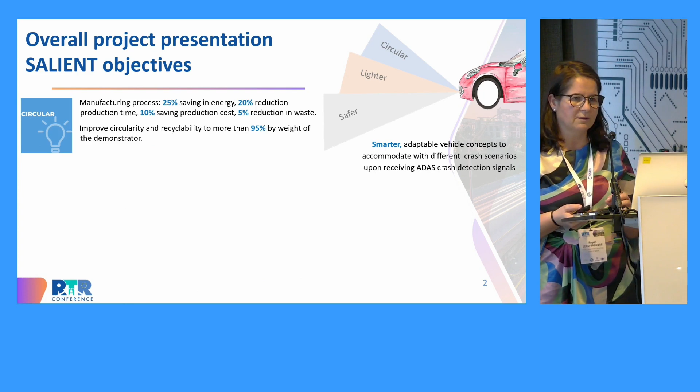Well, the big objective I mentioned before is to improve the safety of the occupants when a crash occurs. It's not possible to avoid all crashes, so we have to be prepared for when a crash happens. This is the big goal, but we have 3 other points that we think are also important. Safety has a cost in terms of materials, in terms of money, in terms of the different materials and processes we need. But we can't forget that the automotive sector is very sensitive to cost, so we have to keep that in mind.

We should be sure that circularity is assured in terms of energy consumption, material consumption, and waste reduction. We have to think about all these points. Here we have some numbers that are the technical objectives, the quantitative objectives we have in this project.

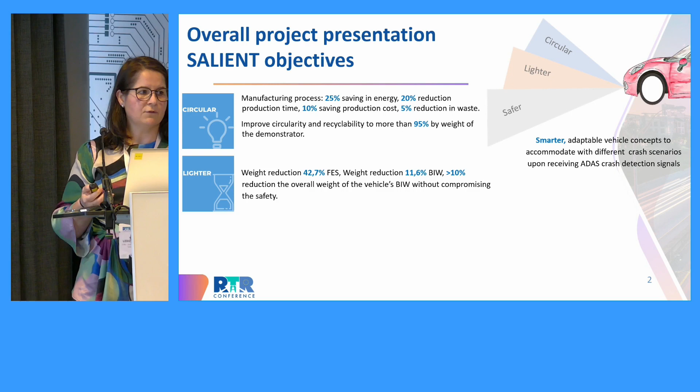We think we also have to consider weight reduction. The safety of passengers should be better, but we have to reduce the weight of the car. So we are working on a reduction of around 42% in the front-end structure. I'll explain later, but the focus, the scope of this project, is the front end of the vehicle.

And I talk about safety. Safety is the big question, the big goal in this project. So when we talk about safety, we have to improve the correlation between the simulation and the real physical test. If we are able to improve this point, the final results in real cars, in the cars on our streets, will be better.

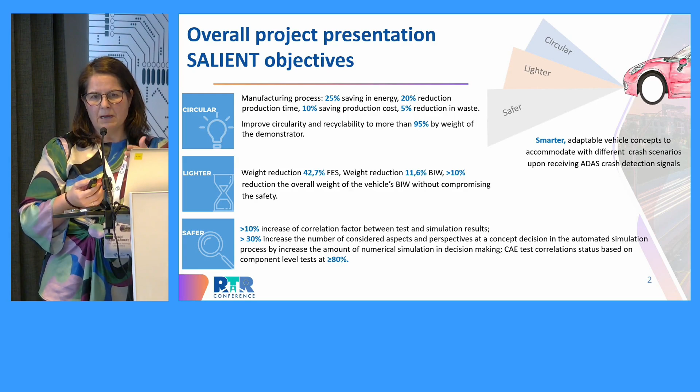Another important point is that currently the standards, the Euro NCAP and other homologation standards, cover a number of different scenarios or crashes, but these scenarios are changing. So we have to be prepared for this.

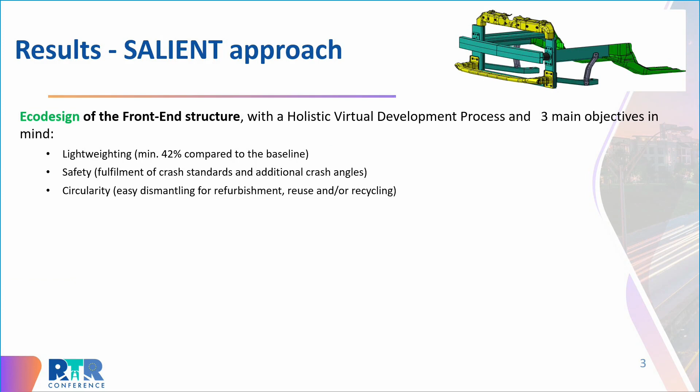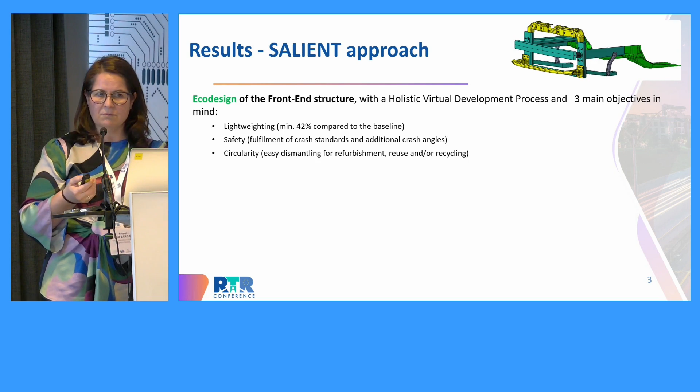So as I mentioned, the goal and scope of this project is the front end of a car. We have chosen the front end because it's the most important subsystem in the car when talking about frontal crashes, and these frontal crashes are the worst in terms of injuries and fatalities. And we have to keep in mind lightweighting, safety, and circularity.

This is, very briefly, the approach we are tackling in Salient. We are dealing with new materials, or rather including some innovations. Then we have to talk about manufacturing processes. All these parts, materials, material behavior, processes, and so on, we need to simulate. We have to be sure they are working at a virtual level.

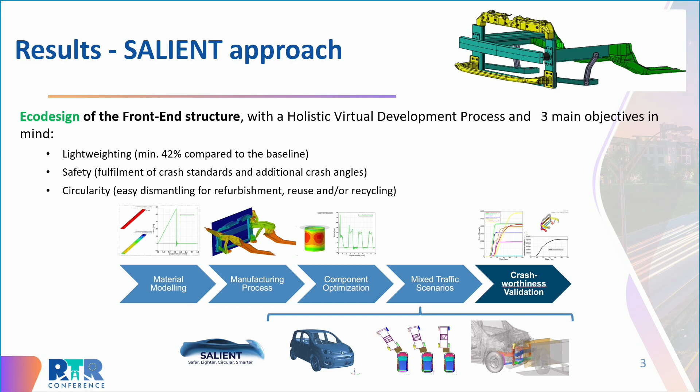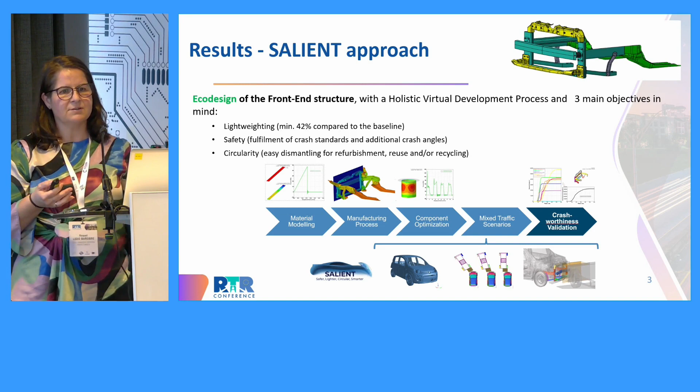Then I talked before about different scenarios. Some years ago, the differences between cars in terms of size and weight were not as high as now. Today, with the electric vehicle and so on, the differences in weight, size, and height in cars are really high. And obviously, when a crash occurs, the impact is really different from a small car of 1,000 kilos than from an electric SUV of 2,000 kilos.

So we have to think about these different scenarios, and also about the different angles of these crashes, because as you all know, the behavior of the car is really good when the crash is at 90 degrees and right in the middle of the car. But if it goes to the sides, or at different angles that aren't 90 degrees, the behavior is really different, so the impact on the occupants is really different. We have to keep all these points in mind to work on them.

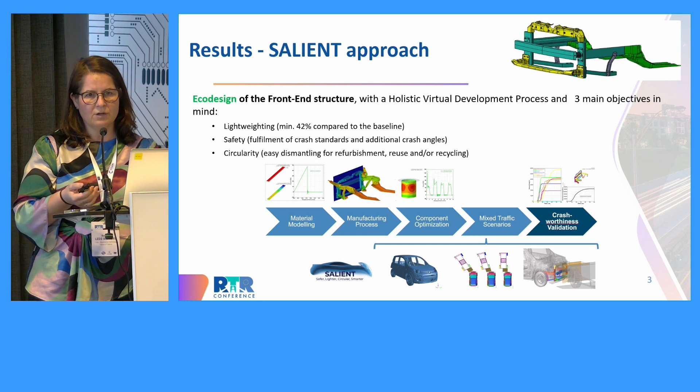And obviously, at the end, we have to be sure that our new subsystem, our new front end, is meeting all the requirements in terms of crashworthiness.

So, materials. What are we doing in Salient with materials? I think most of you would agree that the best solutions at this moment are multi-material solutions. There isn't one magical material. Well, maybe if we talk about graphene or something like that, but we are in the automotive sector, so cost is important. Cost effectiveness is a key factor, so multi-material is the good solution for us.

In this case, we have chosen two materials. One is aluminum, because if we talk about weight reduction and cost effectiveness, we think aluminum is the best option, or at least one of the best options.

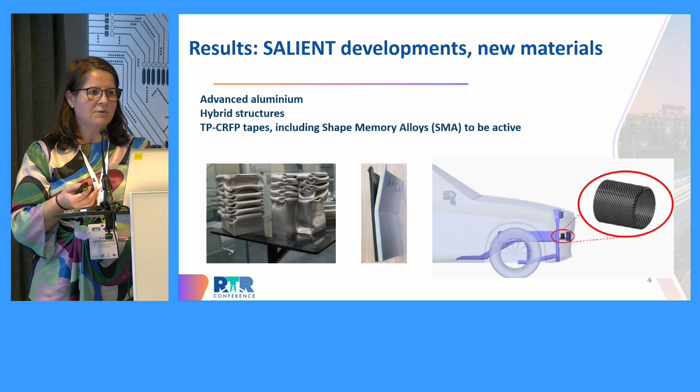And then we are also going to work with thermoplastics reinforced with carbon fiber. You could say we're always talking about money, and carbon fiber isn't cheap, that's true. But we are talking about tapes, meaning we only use these thermoplastic tapes with carbon fiber reinforcement in some places to reinforce the structure. So in the end, the quantity of carbon fiber is not so high, which makes it a good option.

This was in terms of materials. If we talk about what is the approach we are using, we are proposing an eco-design strategy. What I mean when I talk about eco-design strategy...

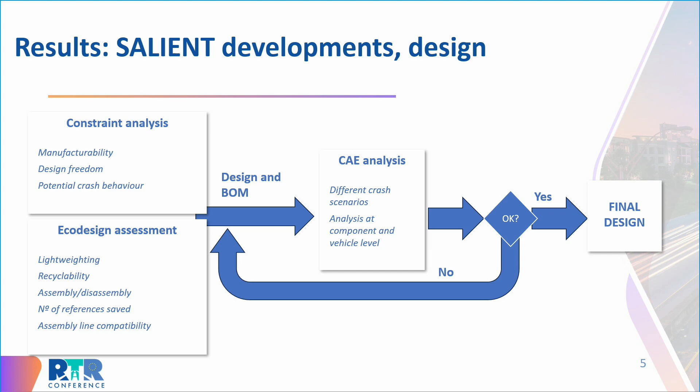First of all, we have to keep in mind the constraints we have in all development, in all projects. We have to be sure that the designs we are proposing will be manufacturable, able to go to the production line. And obviously, if we have to improve the safety of the passengers, we have to meet the crashworthiness requirements. This is mandatory, we can say.

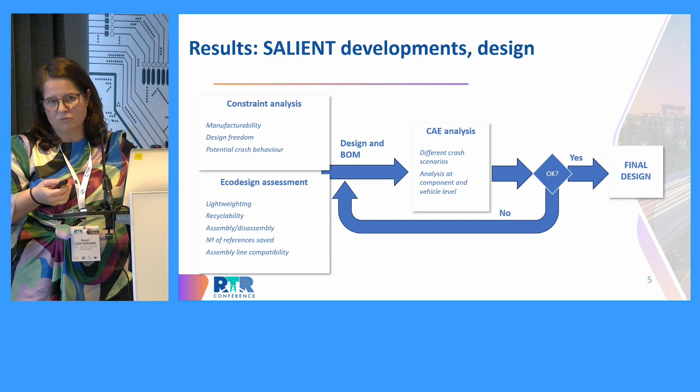When we talk about eco-design, we mean that when we are designing a new part, a new component, we are not thinking only in the behavior of this component. We have to think also about the environmental impact of this part, the environmental impact of the process we are using, and how is the solution for the end of life of the vehicle when we need to recover some part. Is it possible to reuse it, recycle it or not.

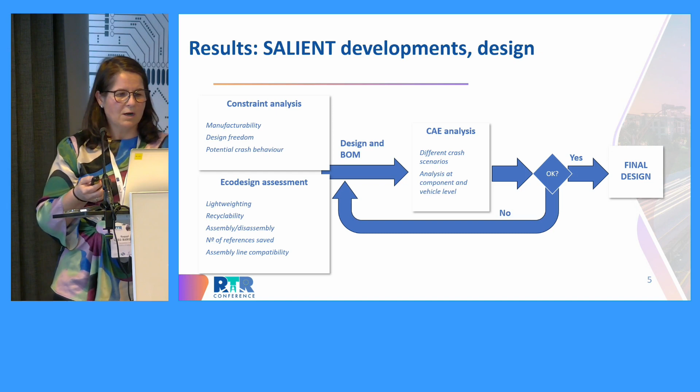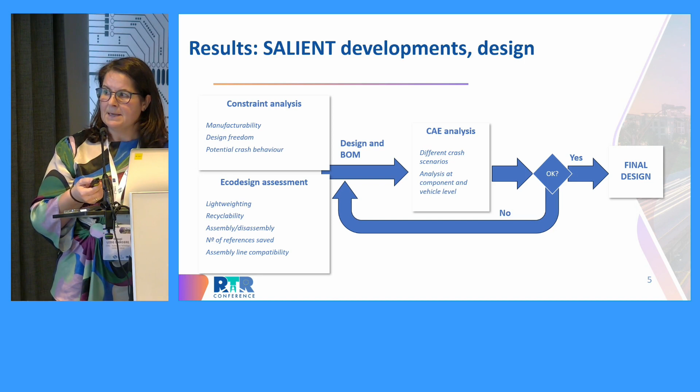So we have defined 5 points: recyclability, the capacity of assembly and disassembly, the integration we can achieve - that is, if we can go from 4 or 5 different parts to only one part - and the compatibility with the assembly line. And obviously lightweight, because it's one of my objectives.

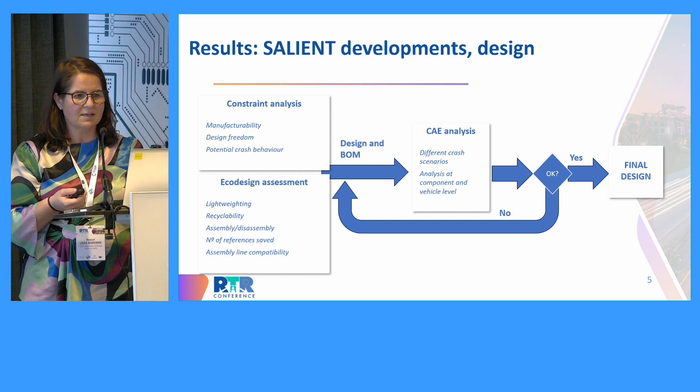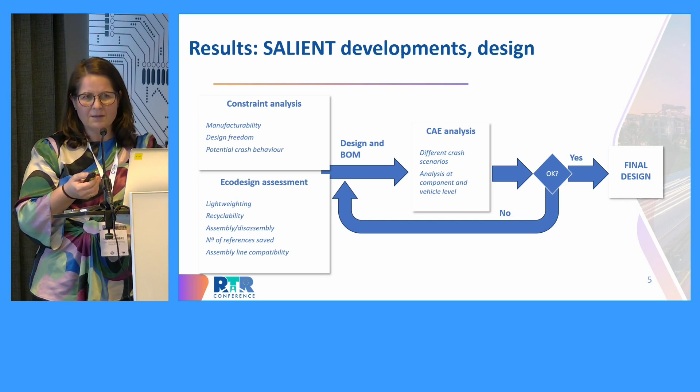So this is my inputs. Then we obtain the first design and the first bill of materials, and we go through the CAE analysis. Here we test the subsystem, front-end structure, but we also test the full behavior of the car. If we meet the results, all is okay, but as you know, at the first time it's impossible or very difficult. So we have to come back to redesign, and we have to iterate 1, 2, 3 times until we obtain a final design that meets all these requirements.

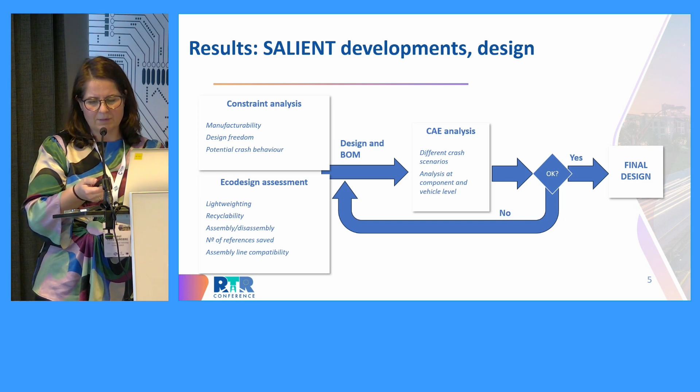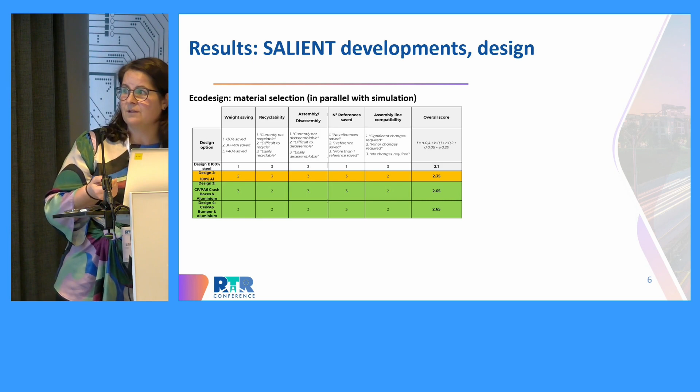What is the way that we choose the first design? I'm sorry, I don't know if the numbers are visible for you, but the important thing is not the numbers, the important thing is the strategy we are using. We have to decide in some way what are the materials and what is the design we are going to use.

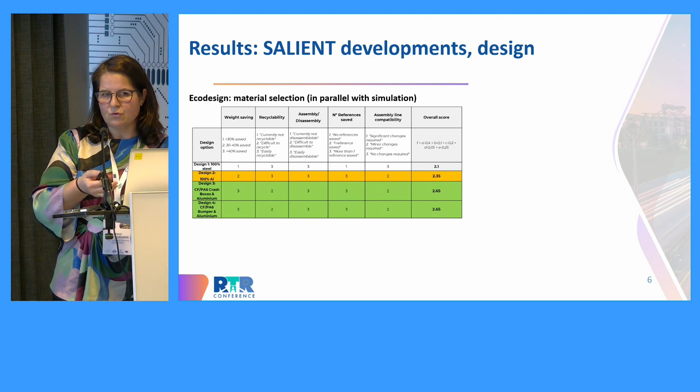So we define our decision matrix, for example. As I explained before, the 5 points we have here are points that we have decided according to the requirements of the Tier 1 and of the OEM presence in the consortium, but also with the requirements that the automotive sector has in general. So for us, I repeat the points: weight saving, recyclability, capacity of assembly and disassembly, capacity of integration of different parts, and compatibility with the assembly line.

And we put different weight to each of these topics, these points. The weight of each point can vary, can be different. It only depends on the strategy of the final OEM, of the preferences. Maybe, I'm not sure, but maybe Volvo has not such high requirements for lightweighting as Stellantis. I'm not sure, but it could be one example.

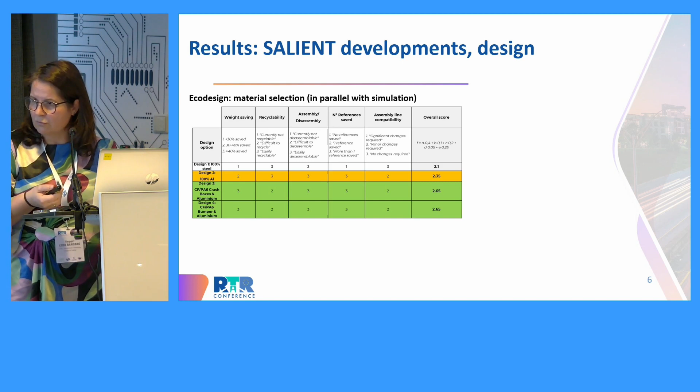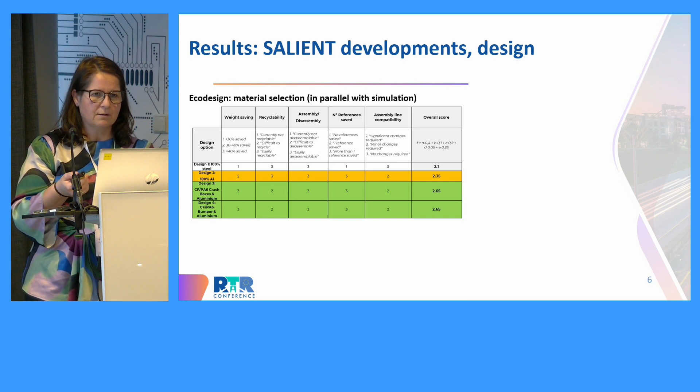So this is the decision matrix, and in this case we are comparing steel with aluminum, full aluminum, and 2 different mixes of aluminum and thermoplastic reinforced with carbon fiber - design 3 and 4.

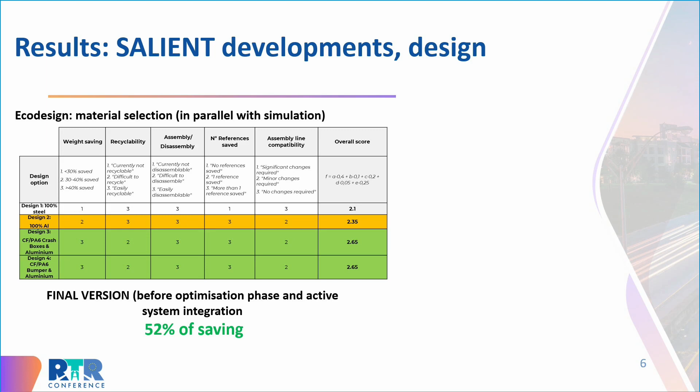At this moment, we are in the midterm of the project, as I told before. So we have a first design, and we have obtained 52% of lightweighting. This is not real - I mean, it is real, we have achieved it - but it's true that maybe this quantity at the end will be lower, maybe 48, 50%, because we have to adjust some design to be sure that absolutely all scenarios of different crashworthiness are being met.

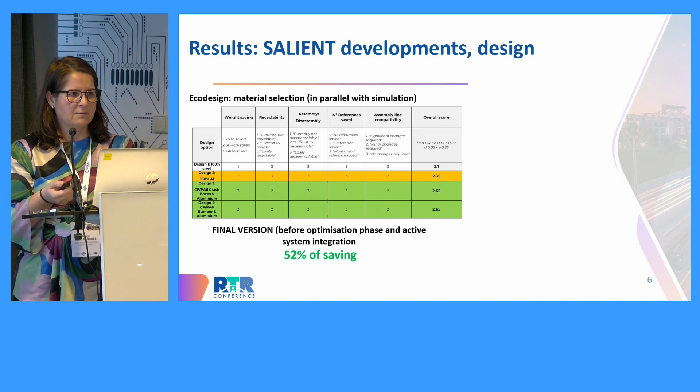And until now, I have only talked about materials and design. That is the standard in our industry, we can say.

All these technologies are related to the question I mentioned before. The best behavior of the car is when the crash is just in the middle and at 90 degrees - that's the best option. So if the angle is different or the position of the crash is different, with these 3 different technologies I will try to convert this off-center crash and different angle crash into one center crash. I'm not sure if I'm explaining well, because it's not very obvious, and maybe in English it's not so easy.

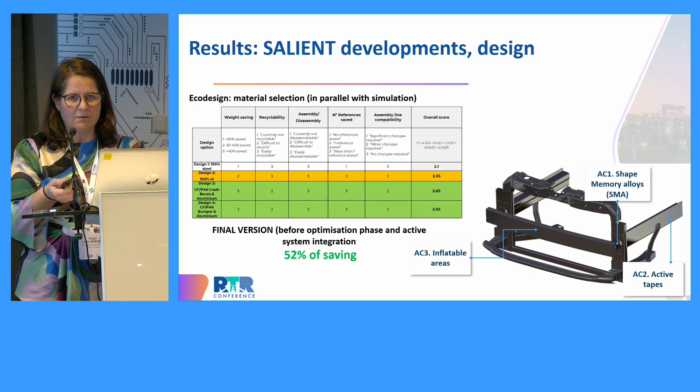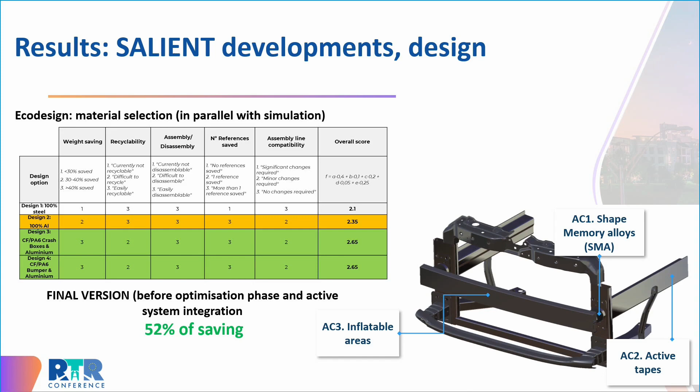And similar to the case of AC2, with active tapes we will be able to modify or move the quantity of energy that is going through the straps. So this is the idea for the next 18 months, with the design frozen, and now we are devoted to developing these systems.

In terms of collaboration with other projects, until now we have collaborated with ELCA, European Lightweight Cluster Alliance, also EnLight Cluster, ALMA, Fatigue for Light, Revolution, Flamingo, Flex Cars, and also Amulet. All of them are projects funded by the European Commission working on this line of lightweight, better safety, etc.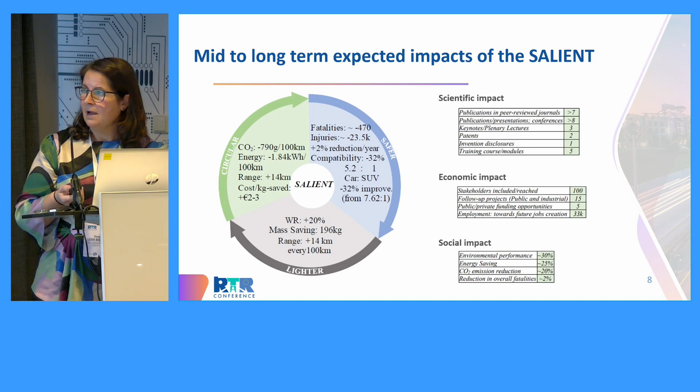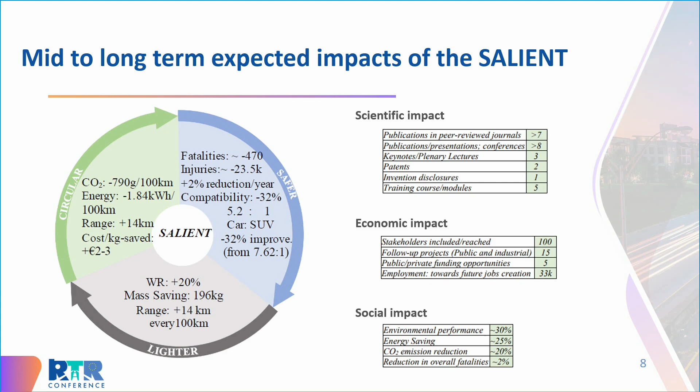And if we talk about the impact, well, it's difficult at this moment. We need one more year to be sure that our developments lead to a real impact.

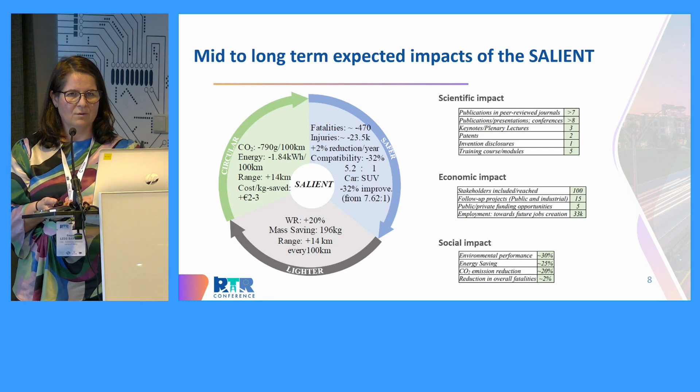But here you can see the summary of our expectations in terms of improving safety, lightweight, and the circular approach. You have more information on the website of the Salient project, and we also have LinkedIn and other social media to contact us, or my email: raquelledo@ctag.com. I think it's time, so...

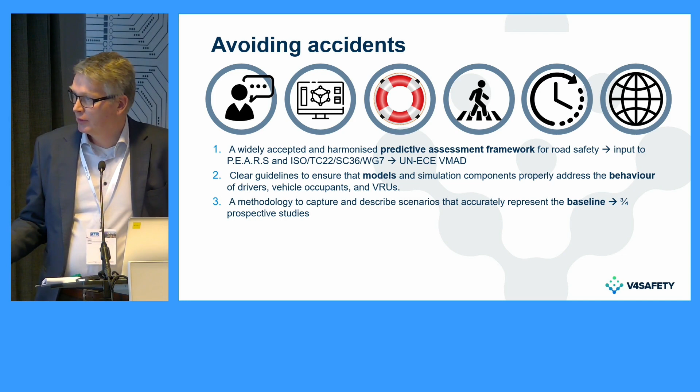The second one is to give guidelines on how to work with all these models and describe the behavior of drivers, vehicle occupants, etc. in a consistent way. Then a methodology that helps to show you what you compare to, what is the baseline. So our goal is to have this approach, this method being used by 3/4 of prospective studies. I'll get into details on that.

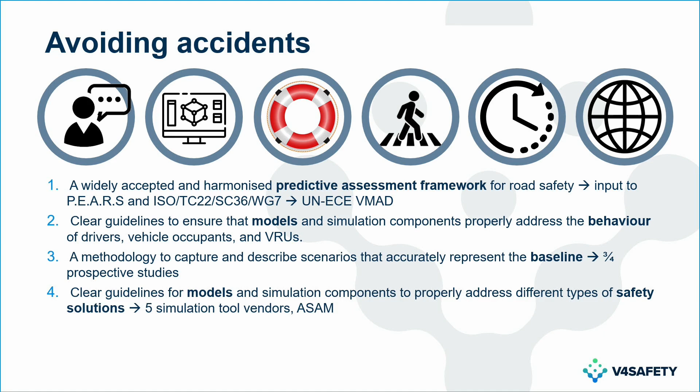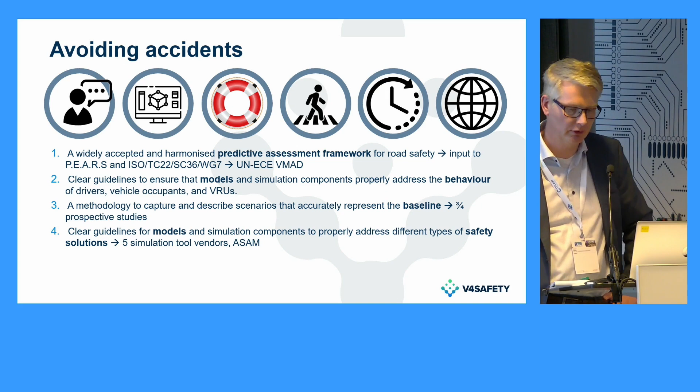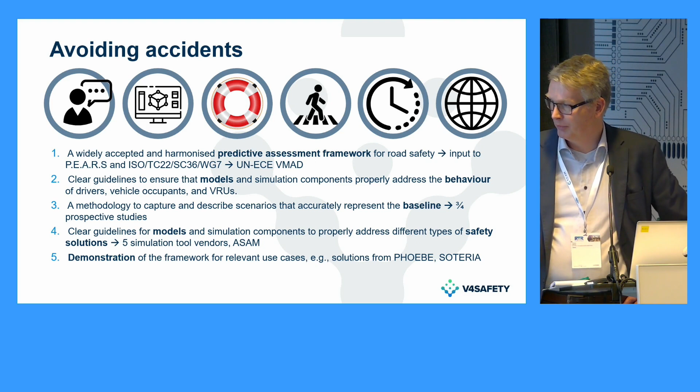Then guidelines on how to use the models and the safety solutions. So how to use your simulation tools in such a way, set them up, that you can have comparable outcomes if multiple partners work on this. Finally, we will demonstrate this with quite a number of use cases, and we work with the sister projects Phoebe and Soteria to share some experience, but also share a use case. And the projection I already mentioned.

Good. We're in year 1 now, and we have quite a few results. So first of all, the draft prospective safety assessment framework is there. We discussed it with our advisory boards in January, and it will be sent out to them for detailed review in the coming weeks. We expect it to be available on our website in the coming months. So you can have a look and tell us what is missing, what you like, and whether it's useful for your application at all.

This also contains some work on definitions. We do not want to reinvent the wheel because there are so many projects that work on definitions already or have worked on that. We align with the Sunrise project on this to use the same, and we are also in touch with the FAME work on definitions and glossary. So the draft framework is now 106 pages, so it's already some substance to read.

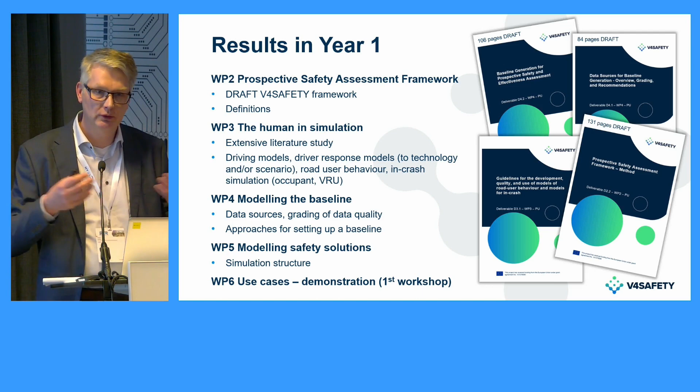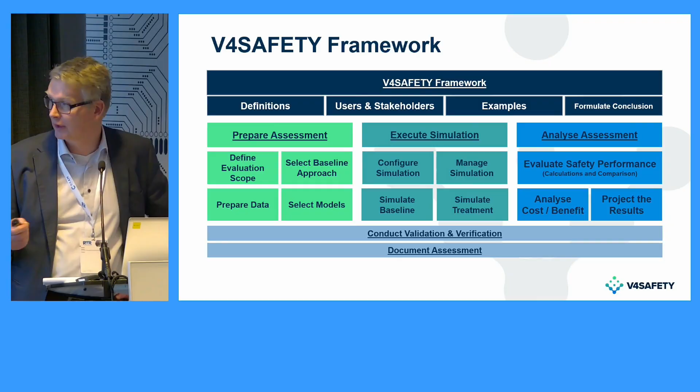Now, it seems like it's easy to write this down, but there's actually an awful lot of discussion underneath them, and a lot of underlying methodology to actually perform this. So that's where the framework is. We also look at cost-benefit analysis, so-called economical cost-benefit analysis. So that's also included. Good.

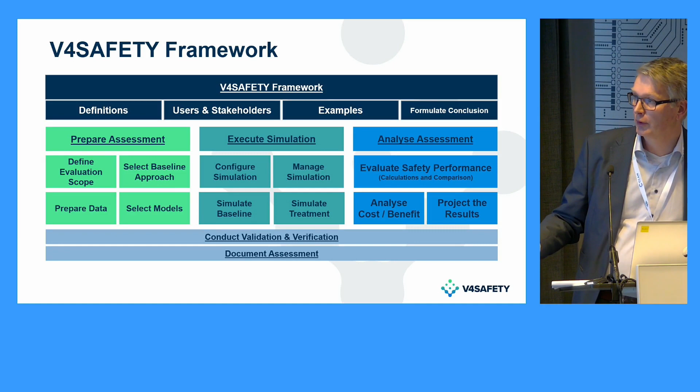Just to give you an example, one of the stages in the beginning, so it's here at the left, the bright green one, define evaluation scope. So there are several check questions here. What is your scope involving? So is it a safety solution, or do you want to look at several scenarios for the same safety solution? Or do you want to compare safety solutions?

Do you want to look at the representativeness of what you're doing, or do you have specific metrics that you really want to apply your KPIs for this specific assessment? So those are the kind of questions that you will get. So here there's an interesting one. Do you need to evaluate false positive activation of your system? So that might really change the nature of your study. And true negatives, for example, do you need to evaluate them as well? Now, all of these scoping questions define how you continue later in the process.

The next thing is on the baseline. Essentially, you first need, of course, to know what you're doing this for, so you need to know your evaluation scope. But then you can start looking at baseline approaches. And the simplest would be, I've seen these accidents on these crossings, let's reproduce them in simulation and see if I change anything, how it improves. It's one-to-one copying from accident cases to simulation cases. Well, that's called baseline approach A, okay, but there are more options there.

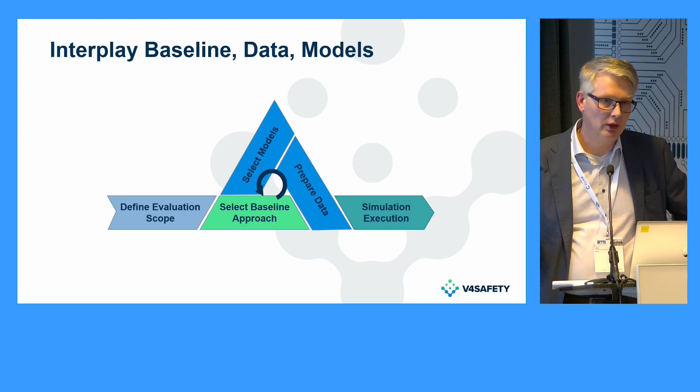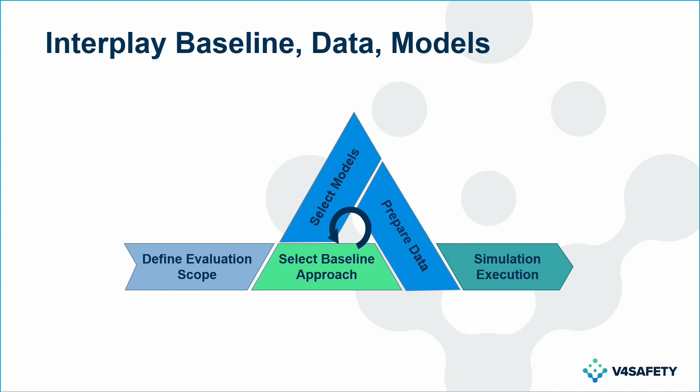Typically, with this choice of baseline approach, you would like to do an ideal baseline approach, but then the models may not be available or the data may not be available. So there's quite a bit of back and forth looking for data, looking for models, and deciding what baseline approach can I really realize and what compromises are acceptable. So that's an interplay that's really important and crucial in setting up your study. And then you can continue to actually setting up the simulation and running it.

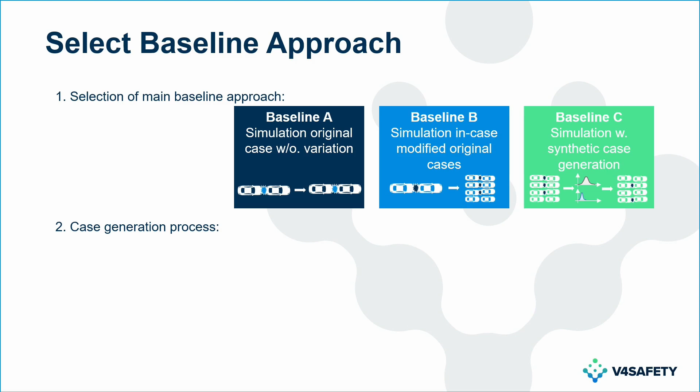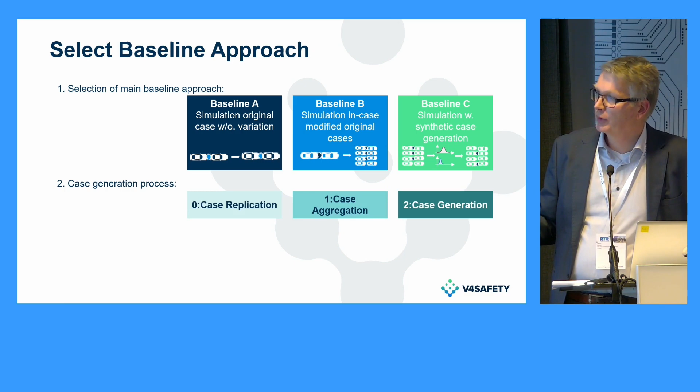Here in baseline approach C, first what you do is create a distribution of what you have observed. So essentially parameter distributions describing accidents or risky situations. And then you sample from that to say, okay, these samples then cover the distribution good enough to actually compare to. Yep. Thanks. I'm going to speed up a bit, and then there is another layer in there which I'm not going to explain now.

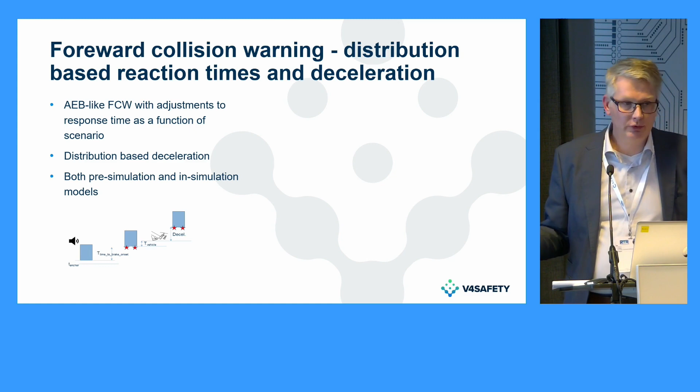Just to give you an example of these models, there's a model that we're working on for forward collision warning, and how does a human respond to that? We work on both pre-simulation and in-simulation models. This model looks at the response time of the human to a warning, then the response time of a vehicle, time to brake onset, and the time for the vehicle to actually do the braking. So some mathematics in here. This model we have described in detail, and we intend to publish this, so make it available for everybody who wants to use it.

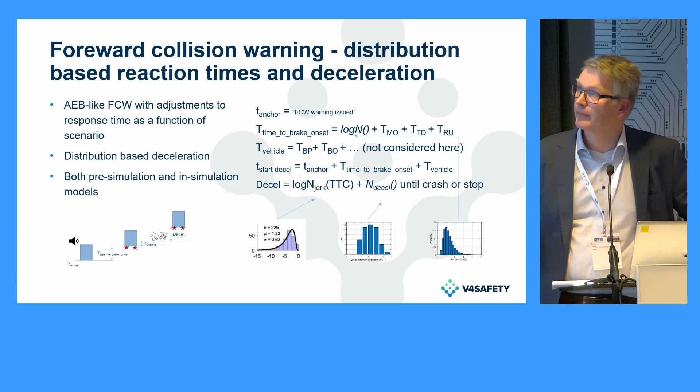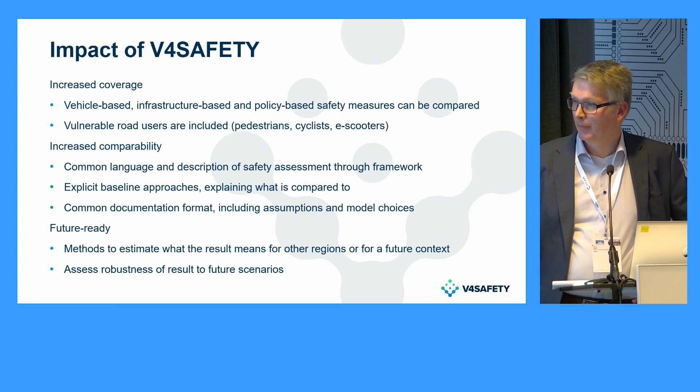Good. If we talk about the impact of V4SAFETY, we include also infrastructure and policy-based measures. So that's really different. Then we work on comparability of these studies. So having a common language to describe with the framework, explicit baseline choices, and also a common documentation format. So we look at the future, saying, okay, we give methods for projection over time and region. And then we work on reduced uncertainty.

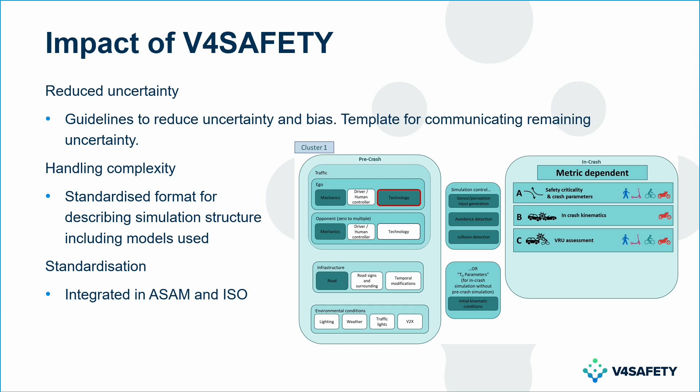Of course, there's always a stack of assumptions and model decisions in such a simulation, but we will create guidelines to reduce uncertainty and bias. And there will be remaining uncertainty, but then you need to be clear about that and see where the source is. So for the simulation structure, we have this standardized visualization. So that's one way to handle the complexity, but of course there is more. And in the end, this should also go to standardization. So in our stakeholder group, there's already ASAM and some other groups.

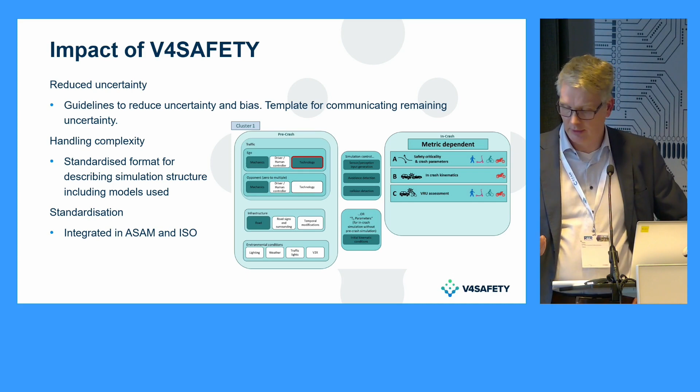Thank you very much, Ciuca. And thank you also for keeping the time and for making reference to the fact that several of these documents and project results are already available on your website. They will become more and more numerous and available on the website and on the Cordis database as the projects go on with their work.

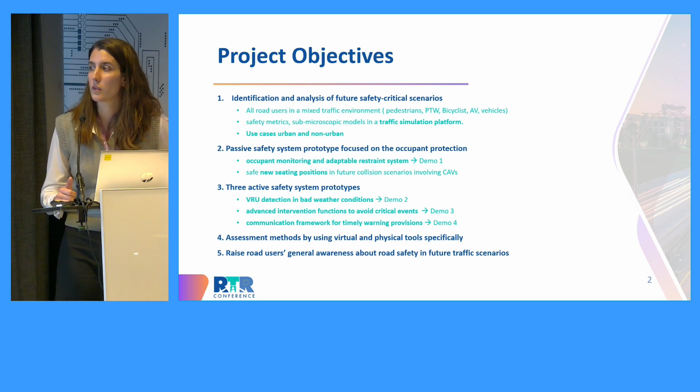And we had another objective to raise awareness about this new situation on the roads and in the cities, and explain to users who don't have the technical knowledge that we have, the new situation that we will face in cities and roads.

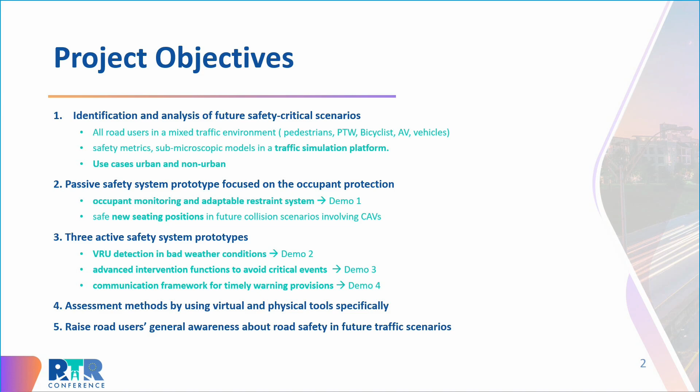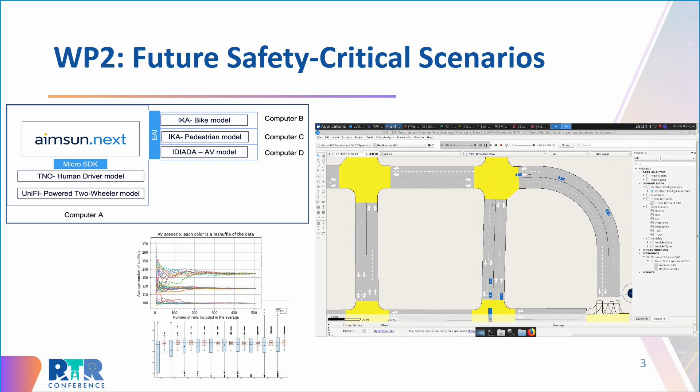So a little bit in depth, Work Package 2 was focused on obtaining safety critical scenarios. You can see here the simulation platform that we developed. We developed models for the bike and the pedestrian. These models were developed using volunteers, so they are real models capturing the real movements of the pedestrian and bike. Then from IDIADA there was a real model of an autonomous vehicle. The driver behavior model was real as well, and UNIFI used volunteers to build the real model for the motorcycles. All of these models were integrated in the Aimsun Next platform.

We had some challenges integrating all these models because they were developed in different platforms. We also had challenges in the computer processing of these models. We needed a great amount of power to get all those realistic models inside the platform and processed. In the end, we found solutions for those challenges and obtained some results. We also saw that we needed more time to get even better solutions, because when we started doing loops of improvement, it was a never-ending process. So we will still be doing loops on these simulations. It was a lot of work to develop this platform, but there is still pending work and research in this area.

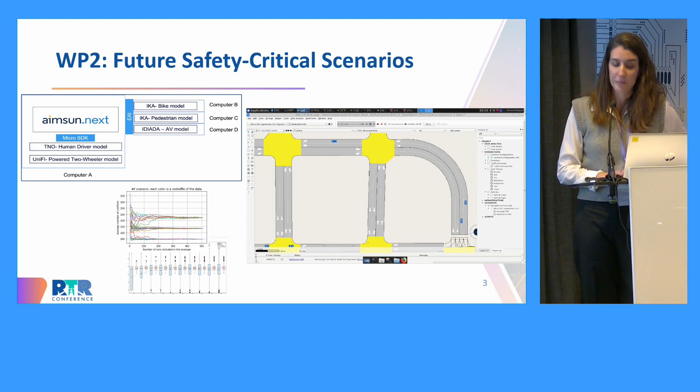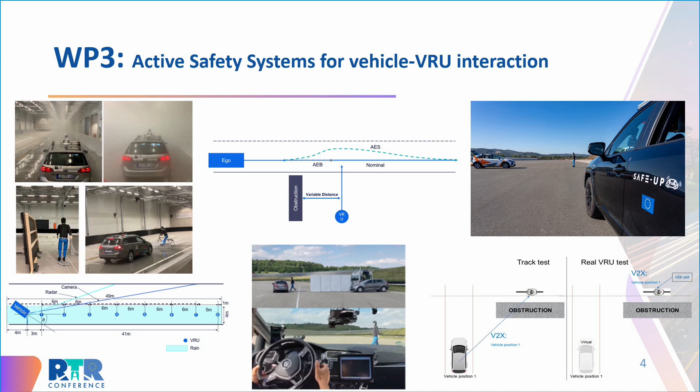In Work Package 3, we focus on active safety systems. We have 3 vehicles. The first one focuses on bad weather conditions. You can see here pictures from the Ingolstadt laboratory with fog and rain, and how the sensors detected the pedestrians with obstacles in front or without them. And we did several tests in this facility.

Then as well, below, a vehicle from Bosch that was for developing the steering emergency system combined with the brake emergency system, so the vehicle had to decide, with obstructions, when the vulnerable road user crossed the scenario, if it was the moment to activate the emergency braking system, or the moment to steer the steering wheel and avoid the pedestrian or cyclist.

Then IDIADA with Toyota developed a third system of communications between the infrastructure, the vehicle, and the pedestrians and bicyclists. The vehicle received signals from the roadside unit informing it that it was facing a critical scenario, and at the same time the pedestrian got a warning on the same situation.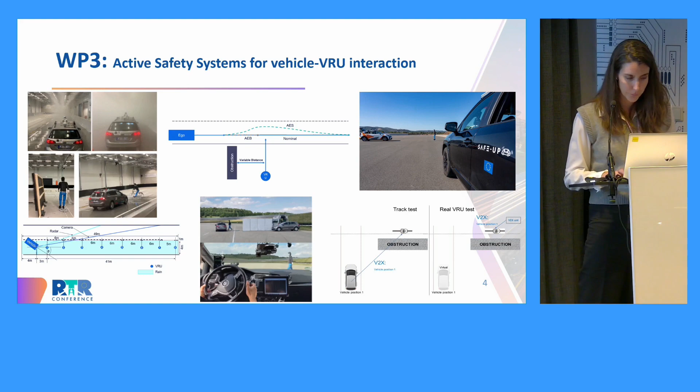Okay, sorry. Work Package 4 was focused on passive safety. We were developing restraint systems and an occupant monitoring system. You can see here the video, which I don't know if it's working well. It's inside the vehicle, and you can see how the volunteers were inside the vehicle, and the cameras were capturing the movement of the person inside. Also, if they were too close to the steering wheel, the range of motion, and giving awareness that the person was too close to the airbag area.

As well, the adaptive restraint system that was developed was included in this demo car, and further on you will be able to see a little bit more on this in a video, and see that the cameras were detecting the movements of the occupant.

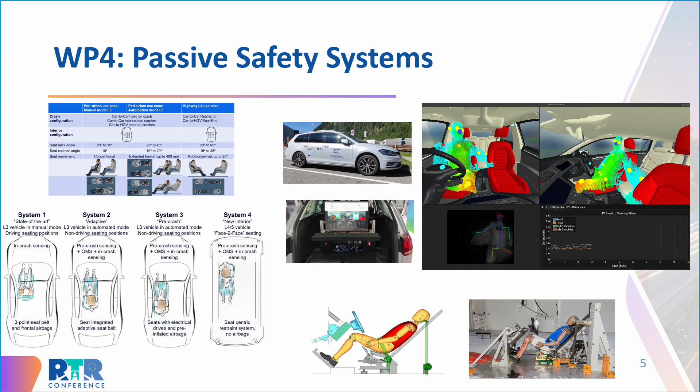Then Work Package 4 worked with use cases on occupant positions for L4 vehicles. A lot of literature review was done to design the sitting positions, also from other projects such as OSCCAR. And you can see below the development of human body models with an adaptable restraint system and people reclined inside the vehicle. Then in the testing facilities of IDIADA, we developed a reclined sitting position with a reclined Thor to do the tests and the correlation between the human body models and physical testing, and prove the adaptable restraint system developed in the project.

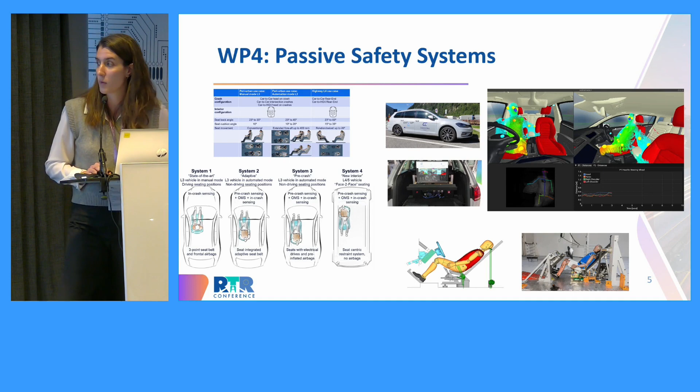Here we faced some challenges because there was only one reclined Thor, and it had to travel a lot around Europe. And the same happened with the sitting position for the sled test that we had to develop, because there are few in Europe. So yeah.

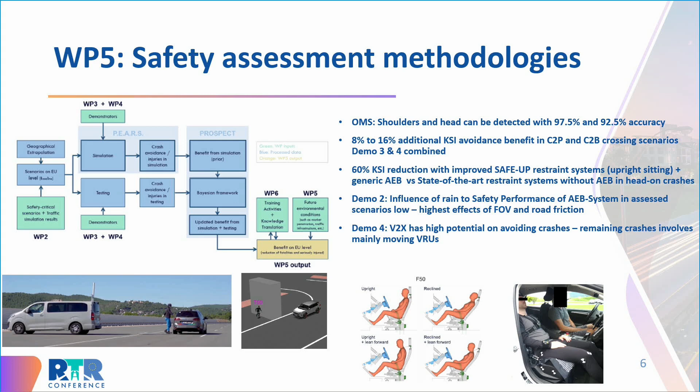Okay, regarding Work Package 5, we worked on the assessment methodologies. We developed a methodology from information obtained from P.E.A.R.S. and previous projects, and some of it went to the V4SAFETY project as input. Here, we tried to assess the methodology combining all the physical testing developed in the project with the simulations to correlate. This testing was validated in the simulations, to get the impact assessment, as a bit of the V4SAFETY work. We were before that project, so now we should be able to get more results on this.

But the main results were the avoidance of critical injuries. If we combine demo 3 and demo 4, demo 3 being the steering and demo 4 the connectivity one, critical injuries were reduced from 8% to 16%. And if you combine the restraint systems developed in SafeUP with emergency braking, there was a reduction of critical injuries of 60%. Demo 2 was assessing the effect of rain on the sensors. And in demo 4, it was seen that connectivity between the infrastructure, the vehicle, and the pedestrians has a high potential in avoiding crashes in situations where there is little time to react and there is obstruction.

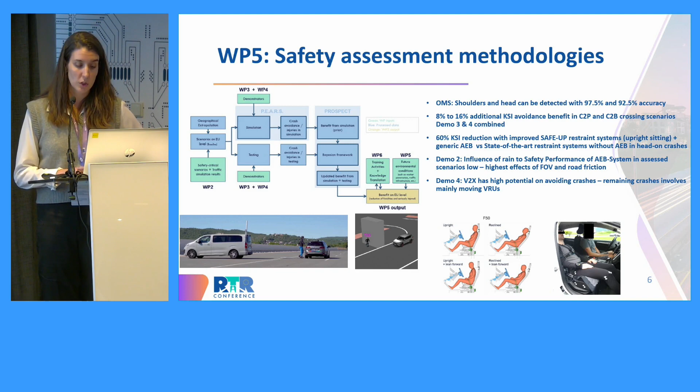The last work package, and not the least, was regarding training activities and knowledge transfer. We developed infographics, presentations, and e-learning courses that are available in different languages. All of these videos and material are available on the website, in the Knowledge Center, and will be there for quite a long time. So if anyone is interested, it's available there with all the deliverables as well. If you want more information, you can contact us. We really encourage everyone to go there and learn from the videos and learning courses that we have.

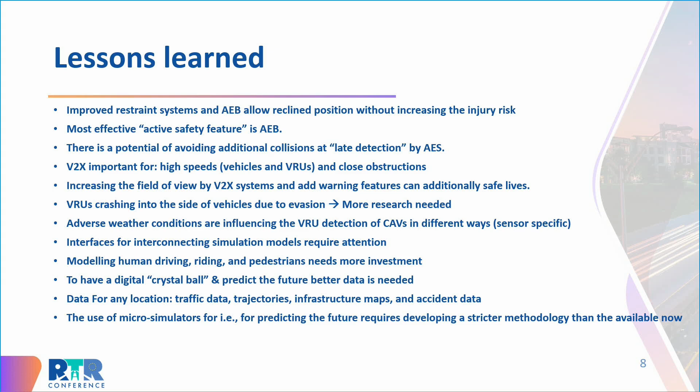So the lessons learned that we got in this project were that emergency braking systems with a reclined position were not increasing the injury risks. Remember that the emergency braking system is the most effective safety feature that we have, and it really covers most of the scenarios that it was developed for, and this system is really important.

The steering system is really good for late detection collisions, but it also needs a little more research. Vehicle to everything is important at high speeds and with close obstructions. And it also helps to obtain more of the field of view of the systems. We also need more research on the side impacts of the vehicles when doing the steering.

And for the bad weather conditions, we were focusing on sensors, and we need more work done on bad weather conditions. The models that we developed require more attention and more research. In modelling human driving, riding, and pedestrians, we need more research. And if we want to do all these simulations, we need more data. Data is crucial, and we need traffic data, trajectories, infrastructure maps, and accident data to keep working in simulations.

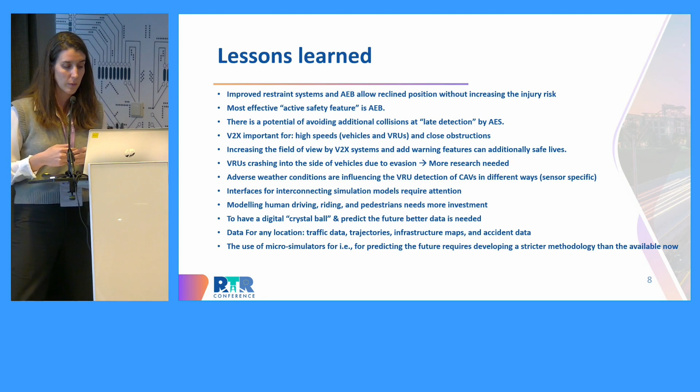And the methodology that we developed in the project to build this platform for safety-critical scenarios needs more investment and more research. As for the impacts of the project, as we were focusing on road safety, we can say that we made progress. We developed systems that improve safety, and we were searching for solutions to expand road safety in better ways. The methodology needs to be redefined, but we worked on several assessment methodologies. The outcomes improve road safety in general. And of course, more research and development is required in these areas.

As well, in order to get all this technology that we developed out there, stakeholders are crucial to be involved to get more exploitation and commercialization of these systems. And in general, the project made an effort to work and contribute to road safety and to future efforts in this area. And finally, I will play a video of the final event.

The SAFE-UP project is a European project that started in June 2020 and is finishing this May 2023. We are here celebrating the final event. The main outputs of the project are the demo cars that we have developed.